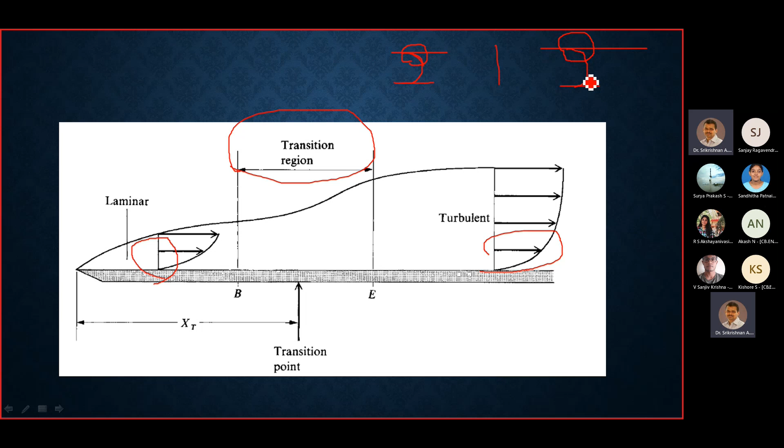In laminar flow, you will have a parabolic profile, whereas in turbulent flow, you have a flatter profile, referred to as the top hat profile. What matters here is the difference, or the rate of growth of the boundary layer. The laminar boundary layer takes more distance to grow, whereas a turbulent boundary layer grows faster, and that's the reason it is thinner in the case of internal flows.

So there are several factors that lead to turbulence. Sometimes when it's essential to incorporate those parameters, obviously the skin friction, heat transfer, etc., are important even in the transitional region. But at the same time, there is no theoretical means to exactly tell when the flow starts becoming turbulent. Of course, we say based on Reynolds numbers.

We say that if the Reynolds number is in such and such regime, it is turbulent. But then the question is, when will that turbulence set in, or what causes the turbulence to set in? There are no theoretical means to exactly say when the transition is going to be, but there are parameters which are found to influence the turbulent transition.

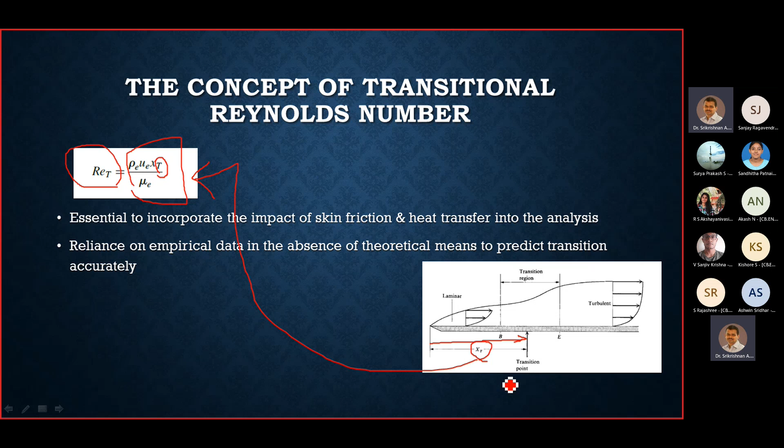Based on that, for each configuration, a transitional Reynolds number is defined as rho v x divided by mu, evaluated at the transitional point xt. In the case of a flat plate as shown here, the transition is considered to be a function of the length. With all other parameters being insignificant, like free stream turbulence and other things, what we can say for flat plate configurations is that the transition can be a function of the axial distance, the streamwise distance along the flow. That's why the transitional Reynolds number is related as a function of xt.

What happens during transition and after transition? This sketch I have taken from a fluid mechanics book, so it applies across all regimes, as I mentioned earlier. The qualitative aspect of the differences pretty much remains similar.

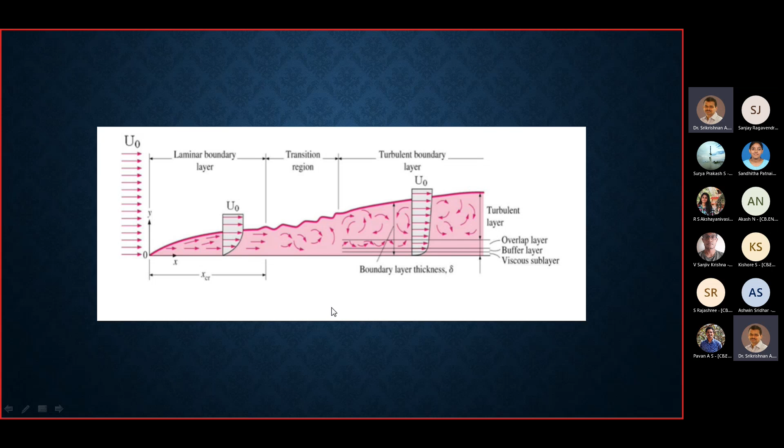In the laminar boundary layer, you have the laminae of fluids, so it's relatively more orderly, whereas when turbulence sets in, chaotic behavior also sets in. Gradually, and more importantly, it's unsteady also. The region of transitional turbulence is somewhat unsteady, meaning it can have fluctuating components, which makes it even more difficult to predict the onset of it.

That's one issue people have in predicting the onset of turbulence, because the onset itself is unsteady in nature. Whereas when it becomes fully turbulent, the exchange processes become more prominent, and the boundary layer will have a distinctly different characteristic as opposed to the laminar boundary layer. Accordingly, there will be other parameters, Reynolds stresses and shear stress, etc., within the boundary layer. So these three regions, laminar, transitional, and turbulent, can occur in any flow: subsonic, supersonic, hypersonic, etc.

So at this point, I want to warn you about possible confusion between the terminology, Reynolds number and Mach number. These two are independently quantifying certain parameters which are important for the flow. Independently, they are two different groupings. The only common factor in these two is velocity, right?

Rho v d by mu, v by a. So velocity is probably the only connecting parameter for the two. Except for that, that non-dimensional grouping per se reflects different aspects of the flow, which means it is possible to have...

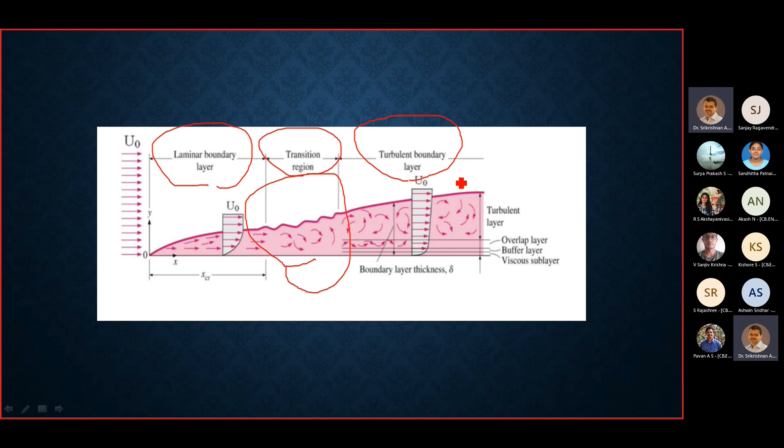So it's possible to have hypersonic flow which is laminar in character, hypersonic flow which is turbulent in character, and similarly, subsonic flow which is turbulent in character, and vice versa, subsonic laminar flow. And same way in supersonic also, you can have turbulent and laminar flows. I'm just saying this so that when you think of the two parameters, Reynolds number and Mach number, you should be treating them separately.

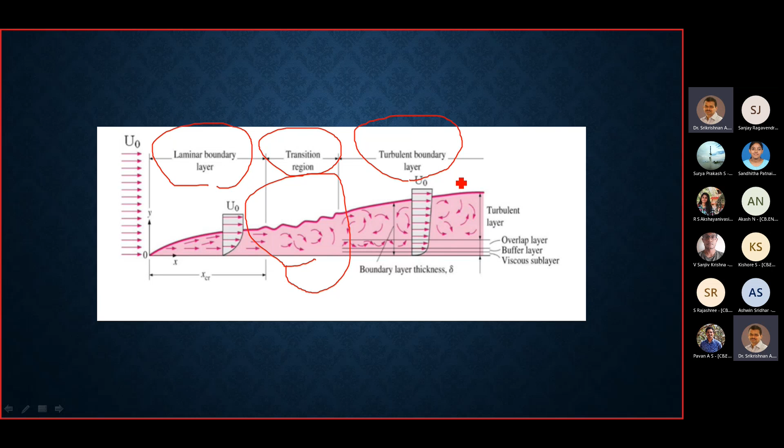The only connecting point is velocity. But what matters is the non-dimensional grouping, which is independent. Okay, now we focus on the most important transport processes, meaning exchange of momentum and exchange of heat transfer. These are the two things which are strongly influenced by turbulence.

In a laminar boundary layer, we know that there is velocity gradient, there is shear stress, there is transfer of energy, dissipation of energy, etc. But all that happens at a microscopic scale. That is, we know that the shear exchange between layers is because of intermolecular action, that is, the cohesion between the molecules, right? So it's at a microscopic scale. The same way, heat transfer also is dominated by molecule to molecule interaction, right?

So that is when the flow is laminar, and that is where we use dynamic viscosity, etc., to calculate the shear stress. Whereas in turbulent flow, layer, there is mixing across the layers. So I guess it should be easy for you to visualize, because laminar, the word itself means that it's like laminate.

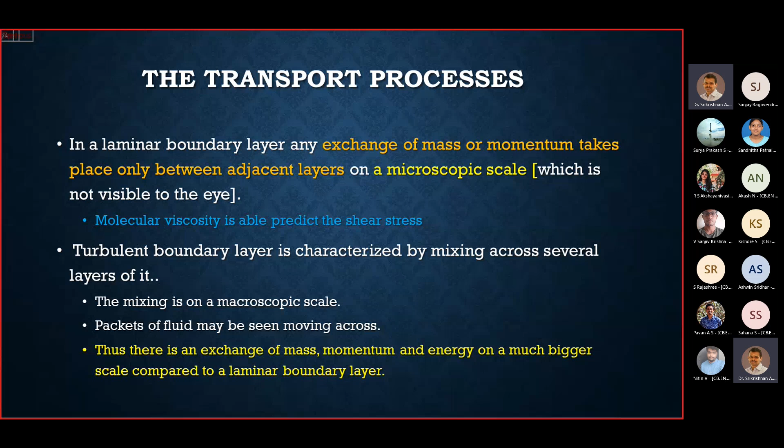Turbulent flow is characterized by the movement of small eddies across the layer. The rate of momentum transfer and the rate of energy transfer are both higher in the case of turbulent boundary layer compared to a laminar boundary layer. This is because of the increased mixing, and that's where we see the difference between the two boundary layers.

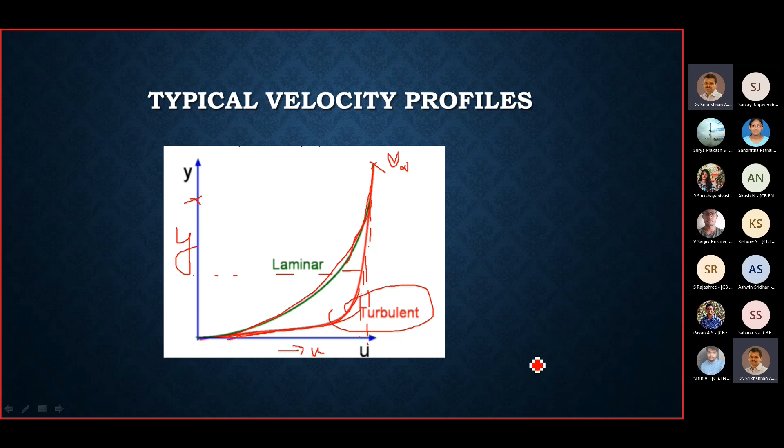So the rate of growth, the rate of exchange between the layers is much more prominent, much faster in the case of turbulent flow, and that is reflected in the velocity profiles for the two cases. If we have a top hat profile for turbulent flow, it is because the exchange rate is much higher due to the macroscopic interaction.

Now what we are talking about is transition - when do we say the flow transitions to turbulent flow? We just said that we can characterize the Reynolds number as Re_t equal to rho_e U_e x divided by mu_e. But what are the parameters which will determine that Re_t? How can I say whether, at this Reynolds number, the transition is going to happen?

Actually, we don't have any conclusive theory so far on that, but people have found that there are a large number of variables. This includes the Mach number, the inclination, the temperature, mass flow rate at the wall, angle of attack, Reynolds number per unit length, etc. There is a large number of parameters which influence the transition to turbulence.

So the importance of this number is that it is so unclear that we are unable to say precisely when we can define the flow to be undergoing transition to turbulence. All those transitional numbers that we see are purely empirical in nature - we don't have a theoretical way to predict them based on the parameters of interest.

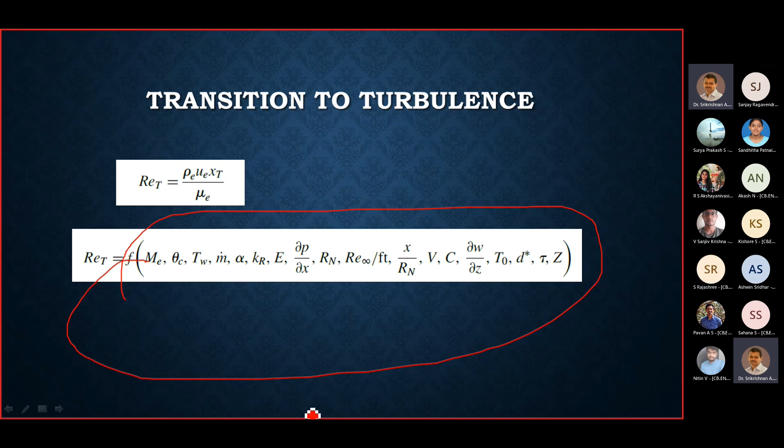Now the question is, if I have a hypersonic flow which is laminar, at what value of Reynolds number can this be expected to transition to turbulent flow? Experimental findings show this - again, purely experimental. We don't have a theoretical model to arrive at that value - certainly we don't have a theoretical model for that. But experimental findings show that the transition to turbulence is delayed in hypersonic flows.

That is, lower Mach numbers, usually low speed flows. Usually 5 × 10⁵ is considered to be a transitional regime for external flows, not the internal flows. Internal flows is where we say 2000, 2500, etc. for pipe flows. But when we talk about external flows, 5 × 10⁵ is usually given as the transitional range.

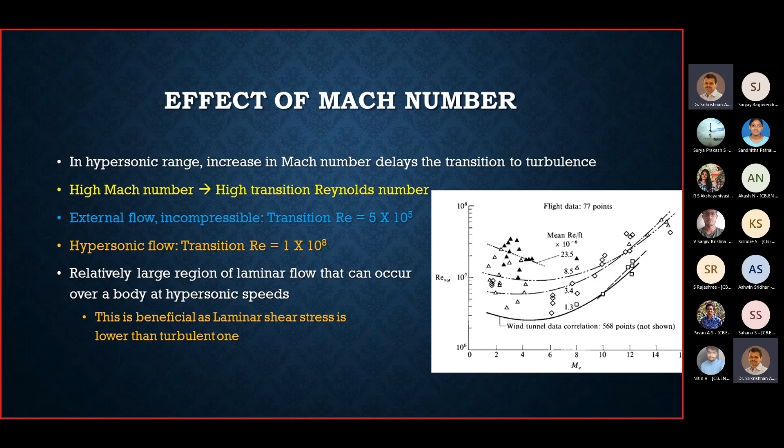Becomes in the turbulence range. This in essence is beneficial because the effect of turbulence is to increase the rate of transfer. So for example, the wall heating during re-entry will be higher when the flow is turbulent. If it is restricted to laminar, the rate of heating, the rate of thermal energy transfer, will be low.

Regarding angle of attack, the observation is that with increase in angle of attack, the flow's three-dimensionality increases. Because of that, the transition to turbulence also increases. It becomes faster or more prominent.

The concept of eddy viscosity, you probably would have heard of in CFD. It comes by drawing analogy to the dynamic viscosity mu in laminar flow. It is as simple as that. In laminar flow, we consider mu to be responsible for the momentum transfer, the shear stress, whereas in turbulent flow, the corresponding value

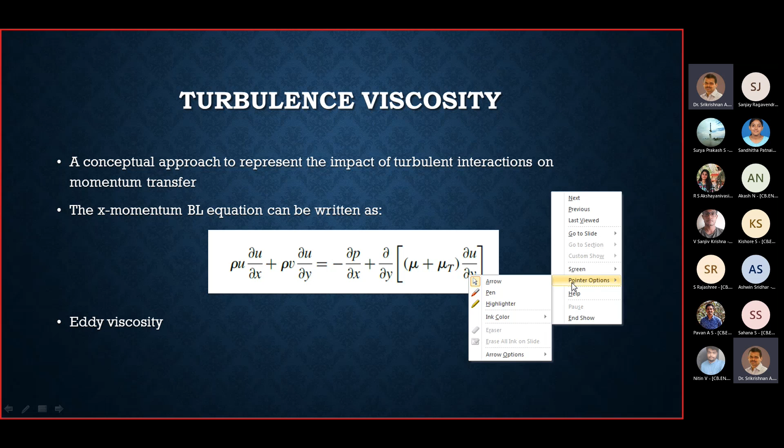is mu t, due to eddies. So in this way, when you have turbulence, du by dy, which is otherwise multiplied only by mu in laminar flow, now has this mu t into du by dy added to the dynamic viscosity mu. So that parameter mu t is referred to as the eddy viscosity or the turbulent viscosity.

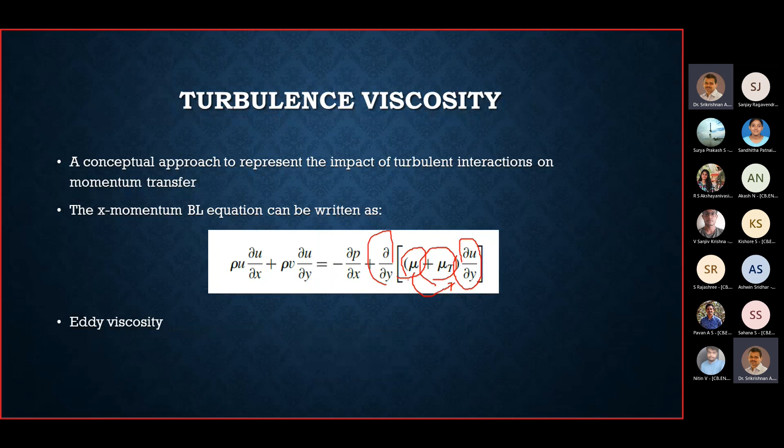Sometimes it's called turbulent viscosity. In CFD it's usually referred to as eddy viscosity. And accordingly, in heat transfer, a similar parameter is used, though it's slightly roundabout, where you use the Prandtl number.

We know that in laminar flow, as I have mentioned many times, Prandtl number is a fluid property defined as mu Cp by K, where mu, Cp, and K are the dynamic viscosity, specific heat, and conductivity of the fluid, of the gas in this case.

So mu Cp by K is used as the Prandtl number for laminar flows. A similar parameter is defined as turbulent Prandtl number, in which Cp is retained as the same value and mu is replaced by mu t and K is replaced by Kt. The reason for this is that Cp, the specific heat at constant pressure, does not change with whether the flow is turbulent or laminar.

At the same time, as we have seen, the effect of shear stress will be higher, or rather what causes it will be more; it is not limited by the molecular value of mu. So that is separately denoted as eddy viscosity or turbulent viscosity. In heat transfer, the macroscopic heat exchange will become more prominent, so instead of K, the turbulent conductivity Kt is used to define the turbulent Prandtl number.

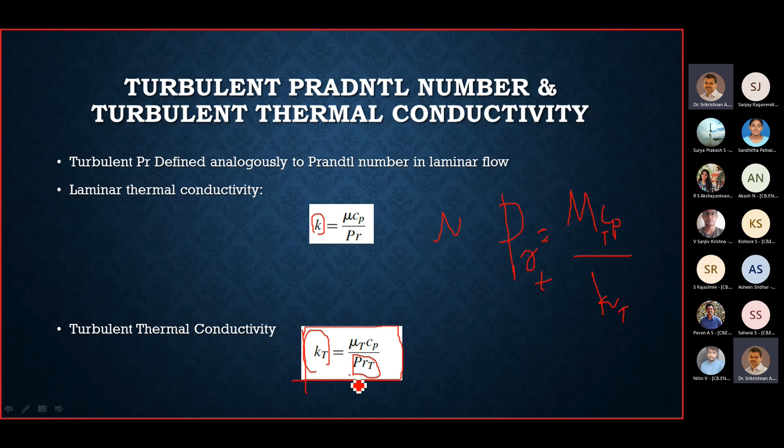So how do you calculate Kt? The answer is that in many cases this ratio Prt can be assumed to be unity in the case of turbulent flows. So in turbulent flow, the Prandtl number, as a common practice supported by some observations, is often safely considered to be close to unity.

So Prt is taken as unity, which means that if you know the turbulent viscosity, you can calculate the parameter called turbulent conductivity as mu t Cp over Prt. And the magnitude of that is certainly going to be higher than that for K.

Sorry, so the interruption in between.

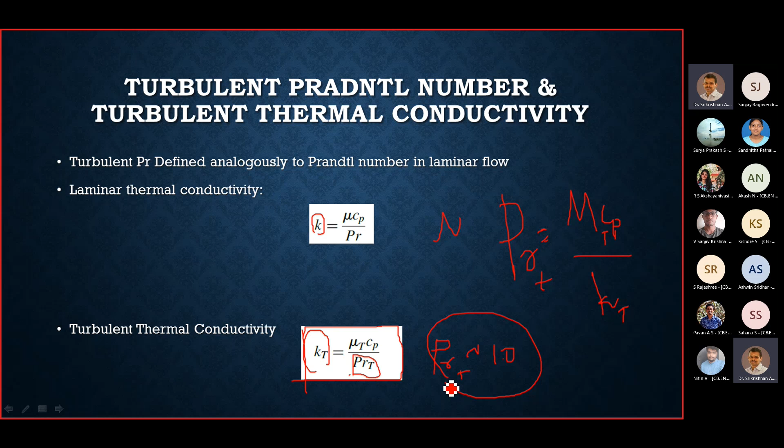The value of turbulent thermal conductivity will be significantly higher than the value for the molecular property, or rather the fluid property conductivity, which is used in laminar flow.

Now, coming to the most important parameters: skin friction and heat transfer. Why are they important? Because wall friction is what basically gives rise to the skin friction drag, that is the shear forces at the wall. So the aerodynamic forces are strongly dependent on wall friction, and heat transfer for obvious reasons, since the flow interaction near the wall is going to have dissipation of thermal energy and excessive heating at the wall. So wall heat transfer, both these are important.

And what is the impact of turbulence on that transport we just discussed? That is the eddy, the movement of the eddies, and the transport of energy and momentum caused by the movement of eddies. These create higher rates of energy transfer.

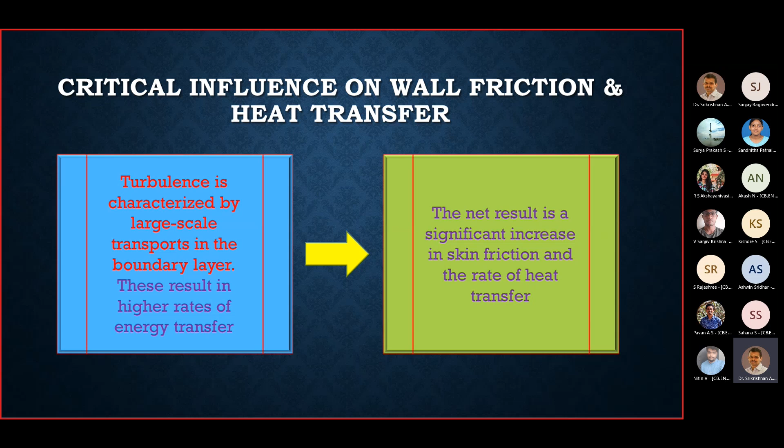So thermal energy transfer is going to be enhanced in turbulent flows, and because of this additional transfer, the skin friction and the rate of heat transfer are going to be high. Skin friction is going to be high because the velocity gradient near the wall is going to be high due to the increased transport rate. Heat transfer is going to be high because the additional convective currents, due to the turbulent eddies, increase the rate of transfer of thermal energy. So both of these are significantly higher in turbulent flows.

Now, at the same time, the skin friction coefficient - this plot is based on calculations, actually computations, numerical modeling, and it shows the variation of predictions in turbulent flow. As I mentioned, we don't have any theoretical models, so the data are either based on experimental studies or numerical studies based on various approaches to numerical modeling.

What it shows is the wall skin friction coefficient as a function of Mach number. So for different turbulence modeling approaches, the values are shown here. They are all comparable within the levels of accuracy that can be expected.

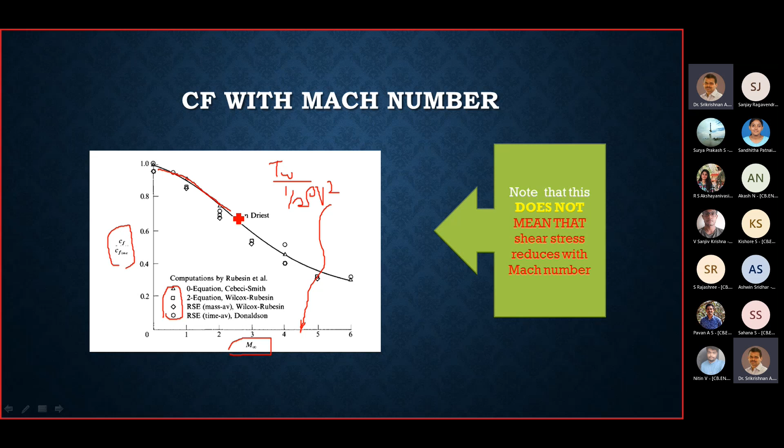And what we see is that with increase in Mach number, there is a drop in skin friction coefficient. But what drops is the skin friction coefficient, not the skin friction as such. Please remember that it's tau w divided by half rho v squared. So with increase in Mach number, the velocity squared is increasing, and that's the reason why this whole thing tends to fall. It's not that wall shear stress decreases - wall shear stress actually increases with increase in Mach number. So this is the variation of skin friction coefficient with Mach number for turbulent flow.

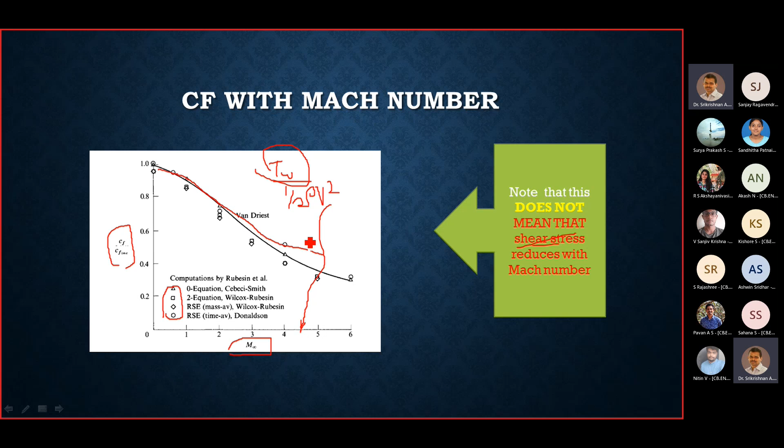So that's what we have here. Again, please remember that it's not the shear stress that is dropping. It is tau w divided by half rho v squared which is dropping with Mach number, because of this half v squared term in the denominator, though tau w is actually growing.

Similarly, for heat transfer: what is shown here is Stanton number. We know the rate of heat transfer divided by thermal capacity of the fluid is on the y-axis, so it basically represents the heat transfer rate, and on the x-axis you have Reynolds number. These are similar to, rather analogous to, the friction charts you probably would have seen in fluid mechanics. Again here you can see the plots are provided for laminar flow and turbulent flow, and turbulent flow parameters are significantly higher than laminar flow.

Now, within laminar flow, you can see values for different Mach numbers - 0, 2, 4, 6, 8, 10, etc. For turbulent flow, also you have values for different Mach numbers - 2, 4, 6, 8, 10, etc. For a given Mach number, say 4, the Stanton number, the non-dimensionalized heat transfer rate, is going to be higher than the corresponding value for laminar flow.

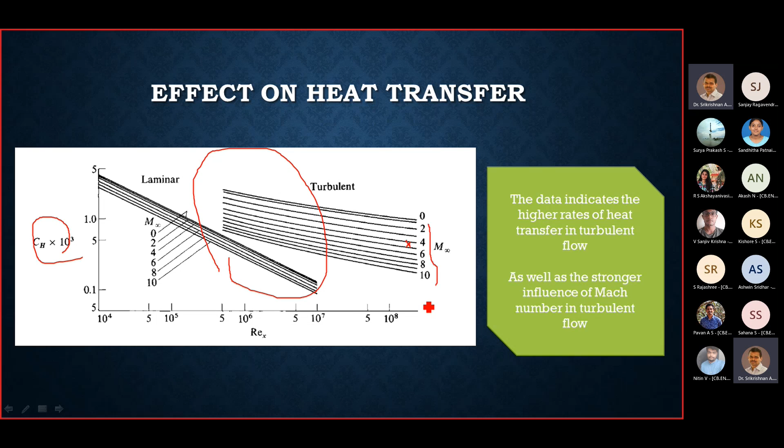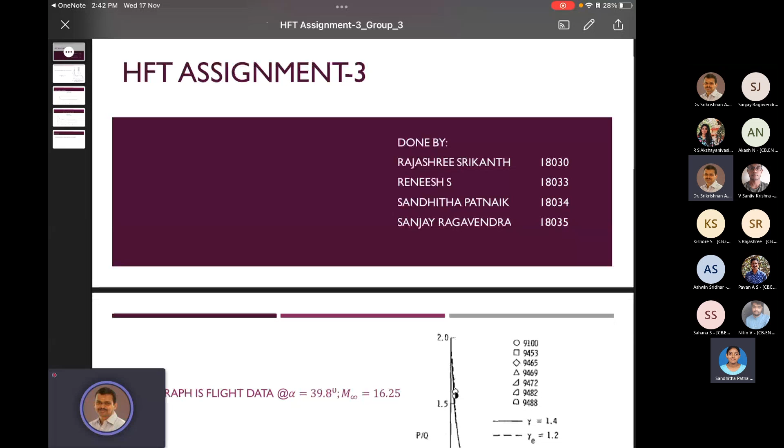Yeah, okay, so these are my teammates. This assignment or task was to use the graph that was assigned to our group and try to digitize it and get the flight data. Here we used...

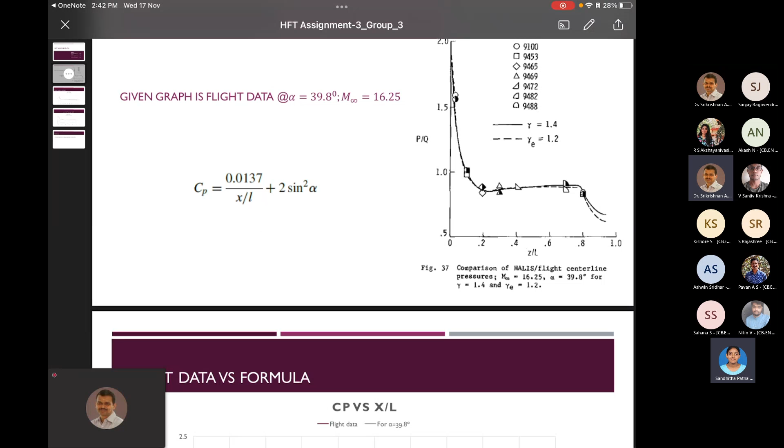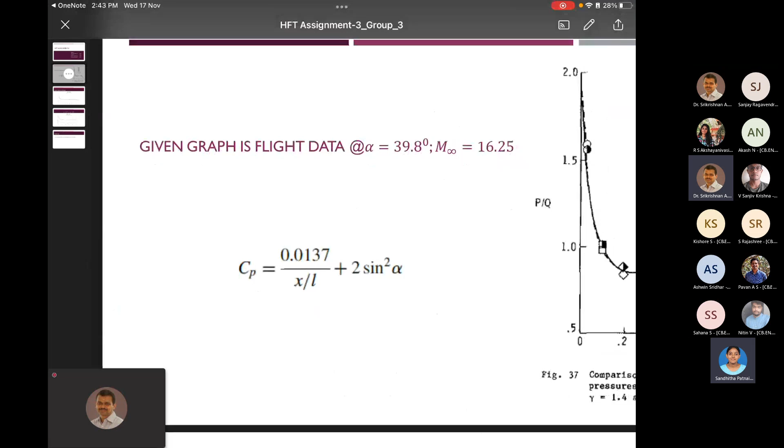I'll show you the CP versus X by L graph. We've taken the flight data from this particular graph, which you can see zoomed in, and plotted it against the equivalence plot using the equivalence equation. Here, the darker magenta color line is the flight data we tried to get from the graph given to us, and the gray line, which is quite thin, is for the given alpha of 39.8 degrees using the equivalence equation.

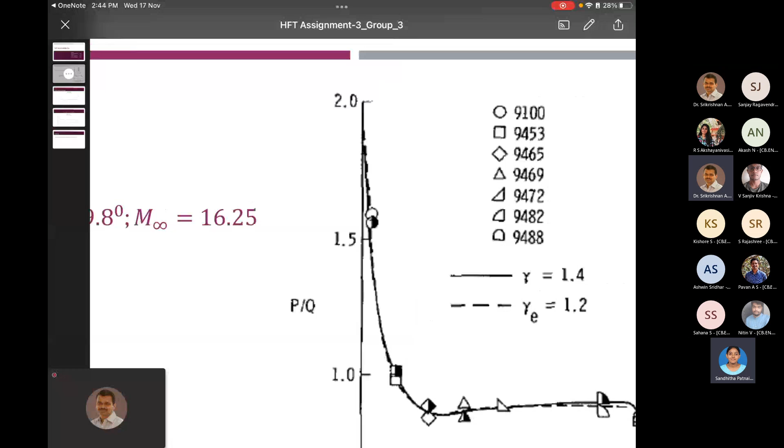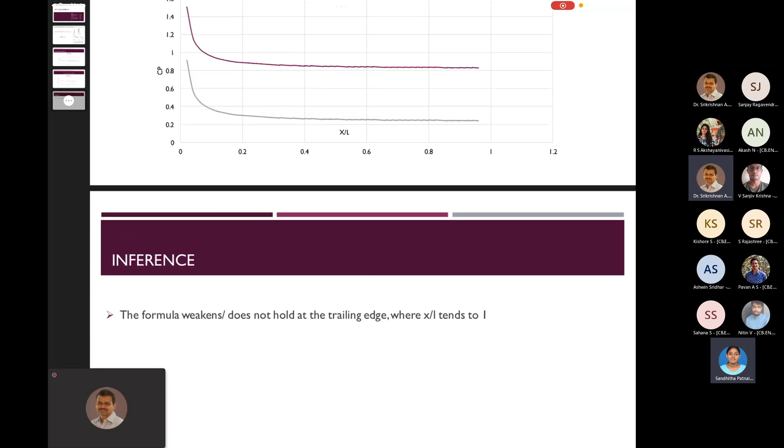So these were the observations, and we just inferred that the formula weakens or does not hold at the trailing edge, where x by L reaches 1.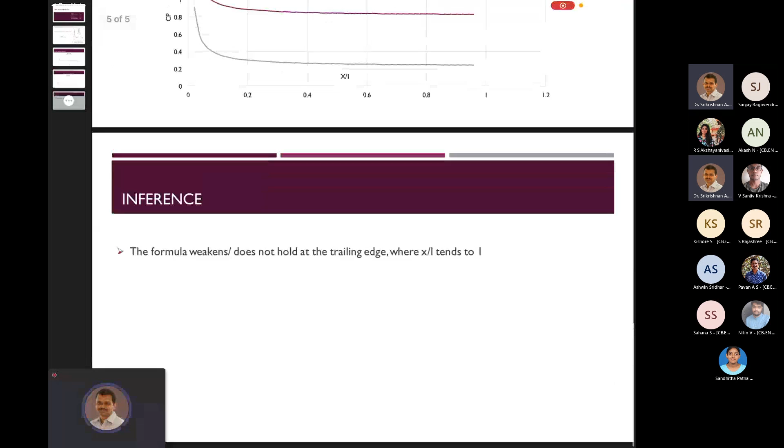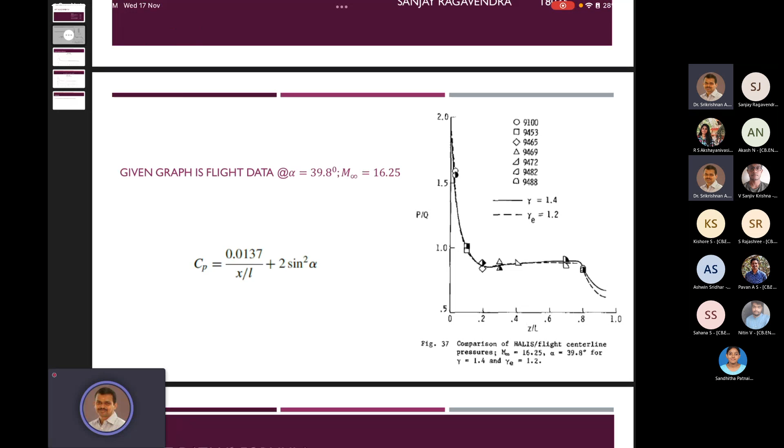This is good. The only thing I want to remark on is, if you go to the first slide where you showed the experimental data, you have points, right? See that? So when you present, even for comparison, it's better to use such points than having flat curves. I guess it applies to others presented earlier too. Whenever you have experimental data, please use dots also, because the dots will tell us where the measurements are available, at what points the measurements are available. For theory, you can use a continuous curve because it's available everywhere. This is a general suggestion when you present experimental data.

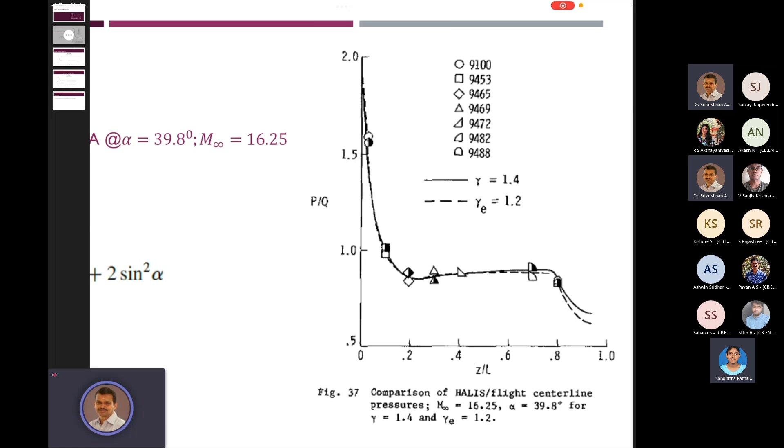Okay, sir, thank you. Next team, please. I guess team 5. Sir, I think team 4 should present now. Sorry, what did you say? So no, sir, team 4 should present now. You said 5. Okay, that's fine. Fine, carry on. Is the screen visible, sir? It's visible to me, yeah.

Okay, good afternoon. We are group 4. This was the plot that was given to us. We have an alpha of 40 and a Mach number of 21.6, and these two plots are for gamma 1.4 and gamma e equal to 1.18.

For the theoretical plots, we plotted using the hypersonic equivalency relation. We got this for Cp alpha is equal to 40, and Cp alpha is equal to 20.

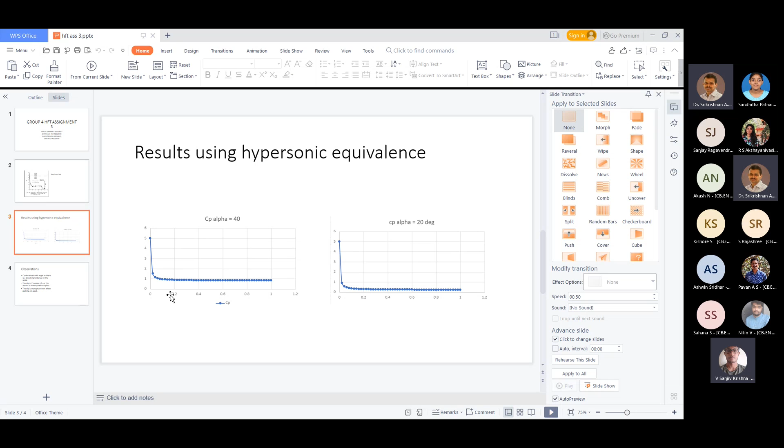So we go to the observations. The Cp decreases with the angle as there's a direct dependence on the angle. The other observation was that in the experimental plots, the dip in Cp when Z by L tends to 1 is absent in the theoretical plot, but present in the experimental plots. The dip in Cp values is more prominent in gamma E. That's all we found.

What is that second point you said? Can you go to the plot and explain what you mean by that? In the experimental setup, we find that when Z by L tends to 1, there is a sudden dip. That is observed every time. Also, when gamma E is used, the dip is even more prominent. That's what we observed.

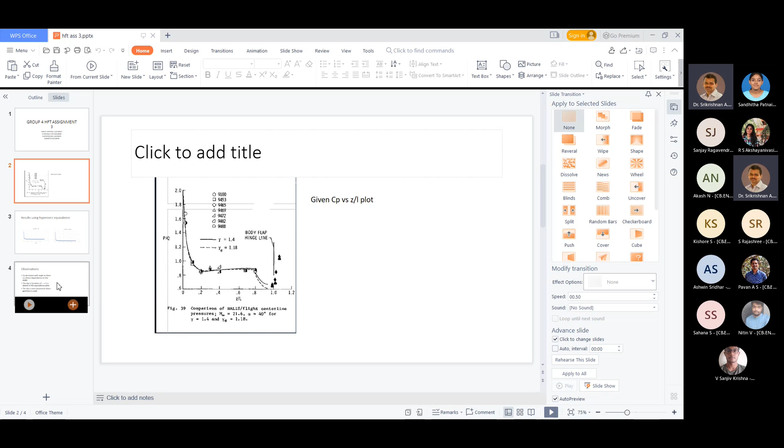State that once again. So when gamma E is used, the dip is more prominent than when gamma is used. Okay, thank you. Thank you, sir.